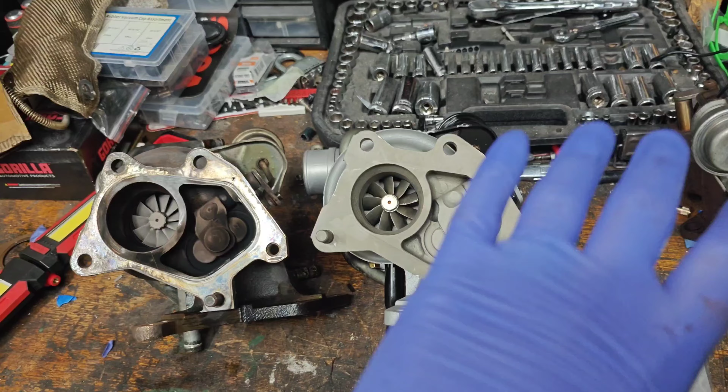This is a VF37 variant. I have a VF30 here that I may do this with as well. I don't need it, but just in case I have that. This is a twin scroll setup, but this works for all VF series, not just the VF37. The housings are pretty much the same on the front and what they can take in the back.

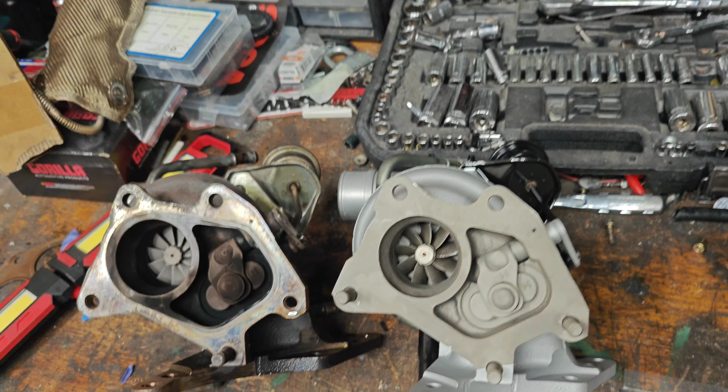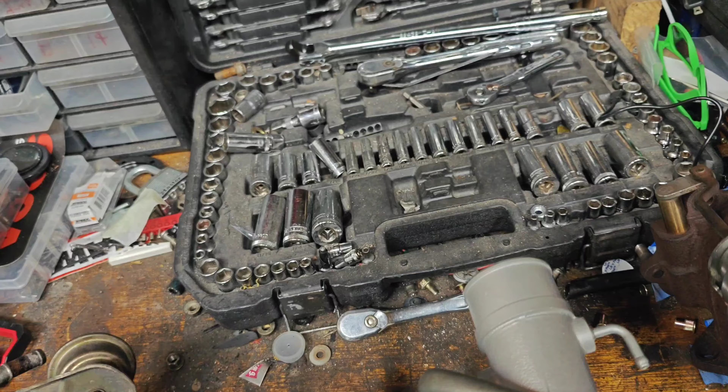So you can clearly see the differences on the turbine side here. Again, we have an 11 blade here stock, and then the 9 blade. You can see this is the G2 upgrade. So much bigger there. On the front, you are going to see compressor wheel changes as well. So let's turn these puppies around, and obviously it's a lot prettier because it's been ceramic coated.

Stock, and then upgraded. Again, looks beautiful too. I got everything painted. I didn't actually ship this, so this wasn't able to get painted, but it's a beautiful looking turbo. Let's get this puppy installed, and then after we do that, we will go get it

tuned. And I'm going to get an electronic tune, so I always do e-tunes where I can actually drive it. And then I get revisions back and forth. So we'll go back and forth, get it tuned, and then see what it kind of puts out.

I would show the install process. It's pretty easy though. It took me like 20 minutes to get the turbo out. Just the downpipe, you remove that. You don't even have to remove it all the way, and then, unless something's in the way, like I had an air oil separator in the way, you're literally just going to unbolt the turbo

from the up pipe. Take off a couple hoses. It's going to leak coolant everywhere, and then you just pull her on out. So it's not that big of a deal. Let's get this puppy installed. Again, before she goes in, same size housing. Nothing's changed, just the internals are changing.

So again, shouldn't experience any more lag. Just should experience more power. It's going to hold boost higher. This one tapers off a lot by redline. I rev to 8K on this EJ207. This is a 2-liter STI motor from like 2005, this revs out to 8,000 RPMs. By 8,000 RPMs, I'm only seeing about 16, 17 pounds of boost.

There's ways to make the VF series have more boost at redline, but even if you do have more boost, it's probably not going to produce that much more power. Just pushing hot air at that point, extremely hot air, just way out of the turbo's efficiency range. So this should help that, and let's get that puppy installed.

Oh, before we install it, just wanted to show what I'm going to do to prime it. So basically what I'm going to do is take off this. You need to prime a turbo if you've never done an install before. Most people do it one way. I'll show that way too, but I do it 2 ways.

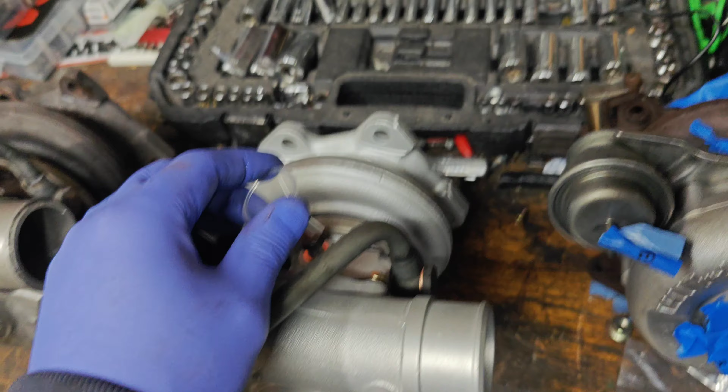So basically I'm going to take this banjo bolt off, put on this minuscule funnel, or a syringe or something like that, put that on here, pour just a little bit of oil through as I'm spinning it. And then obviously most of it's going to leak out the bottom because this is gravity fed down here. You just want to get it started, right? Just get a little bit of oil in there.

Then once you're done installing it, before you start the car, just pull the ignition fuse, fuel pump fuse, pull something to where it won't fully start. And then you can go ahead and just crank it a few times, just kind of push oil through the turbo. You don't want to dry start a turbo, just install it and then just start the car.

You definitely want to prime it. This thing, the RPMs are 10 times, 100 times faster than what the motor's running. So you want to definitely prime this before you just install it. Just thought I'd say that.

Okay, so at the computer now, we're looking over the dyno results after the tune.

So I'm going to show you 3 separate graphs here, but all in all, before I go into them, excellent upgrade. I'm not really one for power adders. I'm more one for spending on the brakes, suspension, lightweight, anything other than power. There's other ways to make a vehicle fast, I think.

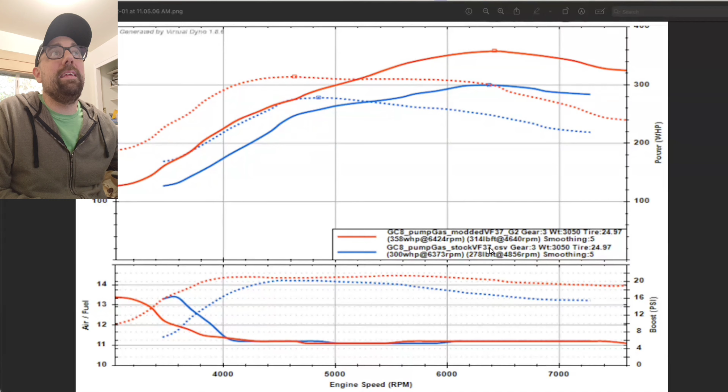But with that said, I was looking for something, A, if I was going to spend money on power, a very small amount, B, something that was identical to stock, just with more of it, and C, somewhere not really more than around 400 wheel horsepower. So let's go through and see what happened here. It looks like... Recording in progress.

Okay, so as you can see here, this is the dyno graph of before and after on pump gas. So this is the stock VF series with all the modifications I already had, and then the modded VF series. So we're looking at nearly a 60 horsepower increase and a 36 foot-pound of torque increase. The only modification that was done in between these two is literally just the turbo. Nothing else was done.

We gained 60 horsepower and 36 foot-pounds of torque, which is good, since some people don't have E85 readily accessible. This is about what I made on ethanol. I made about 350 on ethanol with the stock VF series turbo.

So my mods are just 1300cc injectors, AEM 340 hardwired fuel pump, and I bought an adjustable FPR. Well, I guess that is a difference, an adjustable FPR. That really helped keep the fuel more solid. But the fuel was already present, so that's more just keeping things solid throughout the rev range. You're not really going to pick up horsepower with an FPR unless you're adding to the fuel pressure so you can run a little bit different.

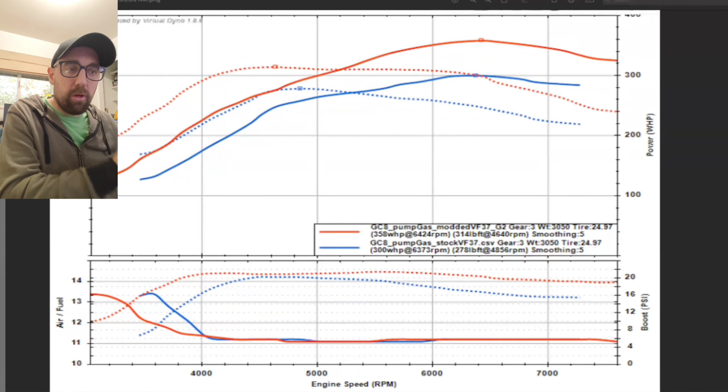So there is no spot up to the redline here where I'm below stock. It just beats everything. There's no lag, no extra lag, nothing. You can see the boost almost comes in quicker with this turbo. I found no ill effects at all. I can't find anything. The turbo was very easy to install. It was just like stock. I'm running an internal wastegate, the stock one, nothing crazy.

Okay, so next, probably the one that everyone wants to see. This is E85. You can just look right at these numbers right away, 423 and 378. Sweet Jesus, this thing is fast. I'm running about the same, maybe a PSI more. I think it's right around 24 and a half PSI. This one was only running 24. But the boost comes on pretty much the same.

I didn't log at the exact same speed, but you can look at it. They come on at pretty much the exact same time. No extra lag. There's differences in air fuel here. The reason there's differences in the air fuel ratio was the one thing I did mod, even though I said I didn't mod anything. Well, the FPR, that doesn't really count. I hardwired the fuel pump.

Before, I thought I had hardwired it correctly, but I changed things up and hardwired it in the sense where it's running 100% all the time. When you turn the key, the fuel pump runs at 100% and doesn't stop until you turn the key off. I have it wired into the fuel pump controller so that if the fuel pump controller is sending any signal, 30, 33, 60, 66, or 100% fuel pump duty, the fuel pump is running at 100%.

What that did was allow me to run consistent AFRs, very consistent. You can see it was kind of choppy with the blue ethanol here because it needs more fuel. There's pros and cons to doing this. Obviously, one of the cons is your fuel pump's running at 100%. It's probably not going to last quite as long. I'm going to plan on replacing it.

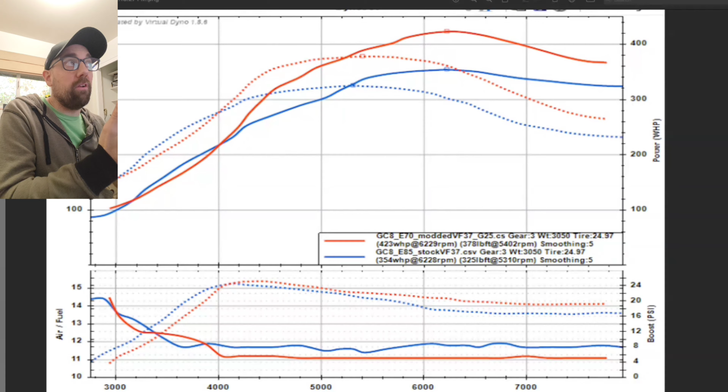I will run this on the street because I drive it rarely on the street. Maybe if I drive it once a week, I'll go hard on the gas once or twice a month. You don't want to run 25 PSI or 24 PSI on stock internals regularly. So I talked to the tuner and I said, let's turn it down for the track. And that is this. This is right around 20.5, around 21 PSI, which is what you're normally going to see. And we're looking at 401.

So 401, 400 horsepower on 21 PSI, 350 foot-pounds of torque. Very solid AFR. Just looks great. This is what I'll run at the track. This is where I'll run most of the time when the car's on. But on the street, I'll do the kill mode just to scare my friends if they want to ride in it. If you want to be very conservative, you could go down even lower.

To hit the same amount of horsepower that I had before, about 350, you could run this thing probably at about 16 or 17 PSI, which is crazy, and get like 350, 360 horsepower on E85 and be very conservative. That'll last a long time. That's about the same PSI as stock, right? And you're running on E85, which is very knock resistant and has those cooling properties, so it would last a long, long time on that. Obviously, I want a little bit more, not too much. That ended up very, very well.

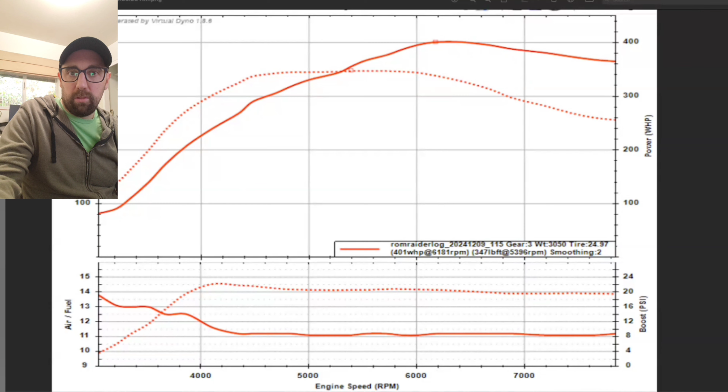Now we'll go into the Dragy stuff. Okay, so when I personally use a Dragy... well, let's back up a little bit. If you're not familiar with what a Dragy is, it's a Bluetooth device connecting to your phone, a tablet, or your laptop, that uses GPS satellites and time, your vehicle data, to determine quarter mile times, 0 to 60 times, 60 to 130 times.

Various times, and people use this with extreme accuracy. I've taken it to the drag strip. They're pretty famous, most people have probably heard of them. You take them to the drag strip on 10-second cars, and they get within less than a hundredth of a second of what the time slip says.

And same with the speed. Getting the same trap speed on the Dragy, literally within a hundredth of a mile an hour from the time slip to the Dragy. So people have done these tests over and over again. They're very, very accurate. Dragys are a little bit better because you can do it at your convenience. That's the biggest thing. Kind of test your modifications and see how your car's doing, see if what you're doing is actually making it faster.

So I bought one of these a little bit ago. You may have seen it on my Instagram. I think I did a quarter mile just on an open stretch of road, which, looking back, I could have done a whole lot of things different, but it ran pretty well.

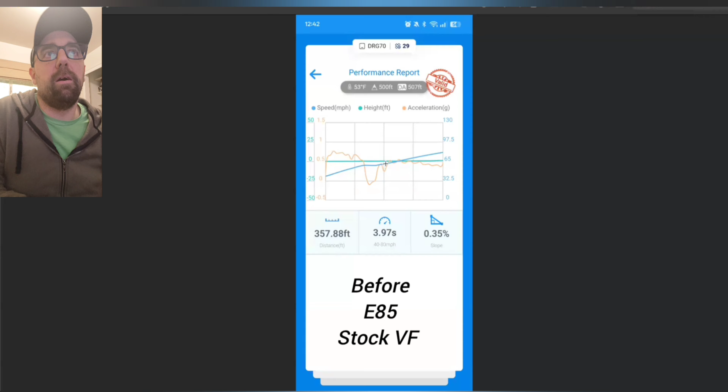That's the newer Supra with the B58. That's a good comparison, right? Just slightly faster than that. Obviously, no one's going to keep those cars stock, but this is what you get with the fastest model Supra, right around here. Okay, so that was that.

You can notice this dip here. This is the dip in the acceleration. You see the orange is because I shifted. I wish I would have done this test just staying in third the whole way, and I can't really go back, because on these other two ones, you're going to see I just stayed in third.

Because I had more torque down low, I was able to just stay in third, and it didn't feel as laggy. It didn't feel like I was bogging down the motor. So I could do these other ones in second and third, but I feel like it's a good test to just stay in third. That way there's no shifting, no extra parameters involved.

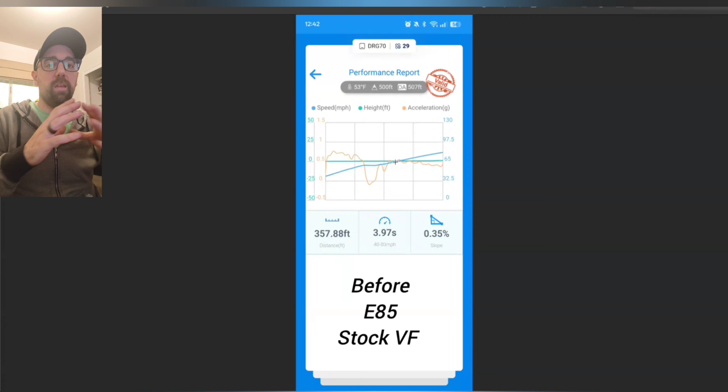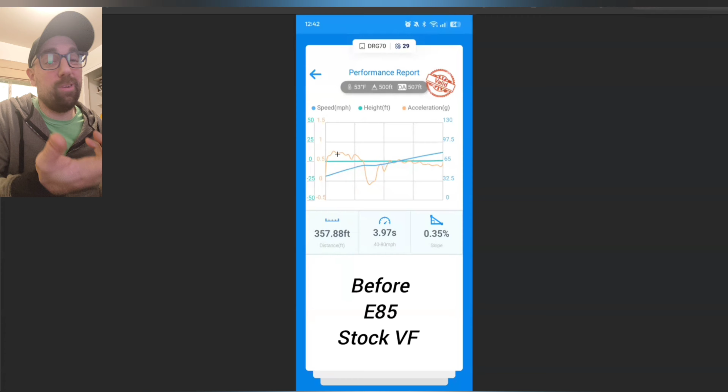So this did involve the shift. You could say that hurt me, or you could say that helped me, because I was in my power band for more of it. And then the shifting part took about a half second at least, so that would add some time to it. But again, we're more in our power band, staying in it the whole way.

So here we go. Here is the pump gas. This is E85 stock VF series over here, and over here is pump gas on the modded VF, what we just did. We just hit 3.59 seconds. So we already saw nearly a 0.4 second jump in 40 to 80, which is a significant jump.

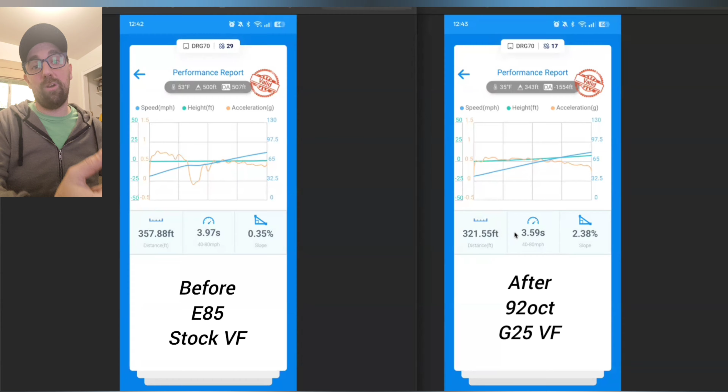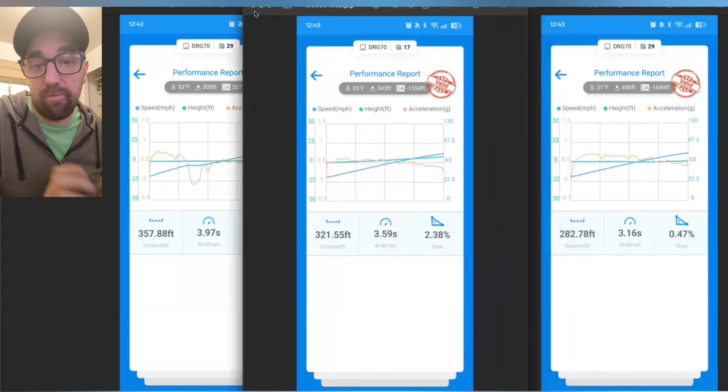That's obviously, if you talk about a tenth of a second being like a car length in the quarter mile, it's almost the same here in 40 to 80. So imagine like 3 or 4 car lengths difference in terms of, if you were racing yourself 40 to 80, you'd be up here, like three or four car lengths in front of yourself, pretty much. And then we get into the crazy stuff.

So this right here, let me move this over a little bit. There we go. This is the 85 kill mode. This is the 420. This is 3.1 seconds. This is crazy fast. But obviously there's faster cars out there, even stock cars that are faster than this. Again, no shifting. This is just keeping it in third, because especially on 85, I had a ton of torque. I started at about 35 and then went into 40.

Yeah, it is fast. To put it into perspective, I'll put a link in the description to 40 to 80 times for production cars. The Hellcat that I always make fun of is the quintessential drag car, that's its bread and butter, is 3.1 seconds 40 to 80. Granted, it may still be burning out. 3.1, the same as a Hellcat.

A Nissan Skyline GTR, the newest ones, are 3.2 seconds. You're already beating that. A Nissan fucking Skyline GTR. Again, these are the stock unmodified versions. And a Carrera GT3 RS. This is already beating those cars. Some would say supercars. Hellcat maybe not a supercar, but in the drag aspect of it, sure. But yeah, holy shit. This is very, very fast.

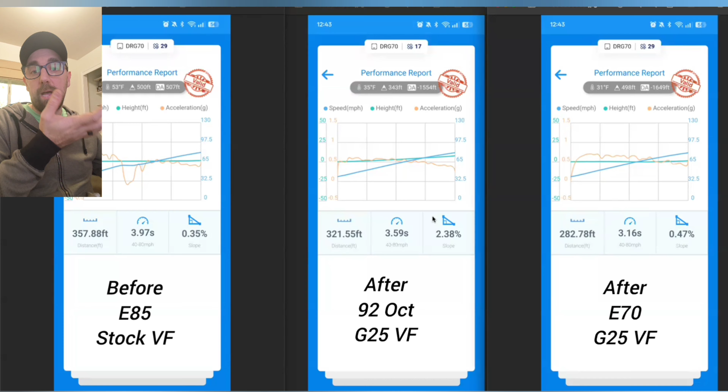Maybe I'm just getting older. I guess dyno is the old school method, but with a dyno, you're trying to force air and pretend, especially if you have a top mount, force air and cool stuff off. You may be able to get more or less on a virtual dyno. So, varying degrees. If you don't want to use a dyno, you can do this test too. A Dragy is like $150-$200 now. Very easy setup, and you can easily see as you progress what kind of gains you're making in general.

This is a great one for people with the STI 6-speed, because in third gear, if you just keep it in third, well, it won't be a good test for the USDM guys. And that's another reason why I went out here, because 80 miles an hour in my third gear is like 7,800 RPM. Most USDM models won't rev out that far, right? They only rev out to 7,000. So you would have to shift into fourth gear. I can literally do this entire thing in third. So that gives me a leg up there, because I just rev it out to 8.

Because I need to do that for the logs anyway that I'm sending to the tuner, so that does help me out quite a bit. But either way, what we're looking at, 3.6 or 3.16. Crazy 40 to 80 time.

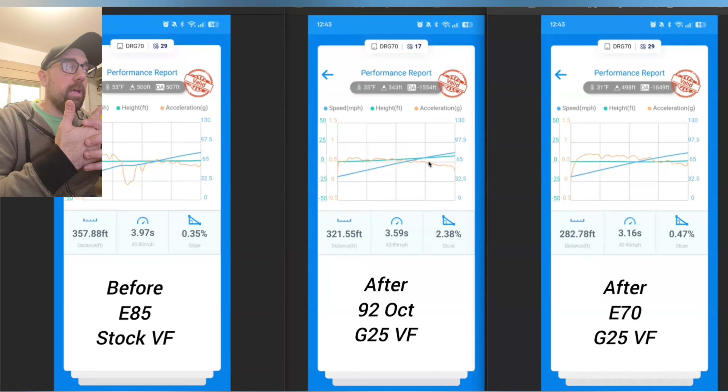All right, let's go out to the garage. Let's look at the turbo installed, go over a little bit what's left on the car, and then I did some changes to the garage. Okay, so back in the garage. Finished up the car. Obviously, wanted to show the finished install.

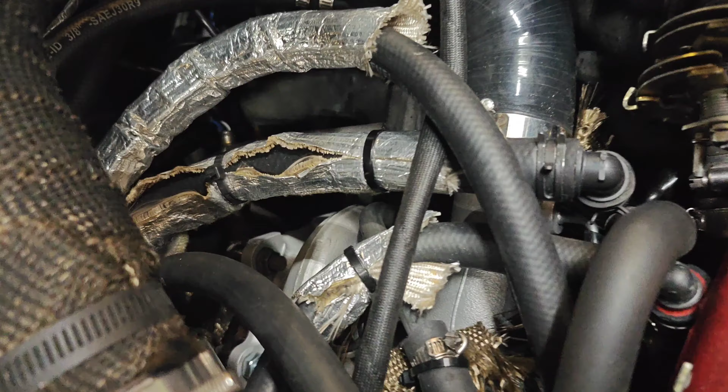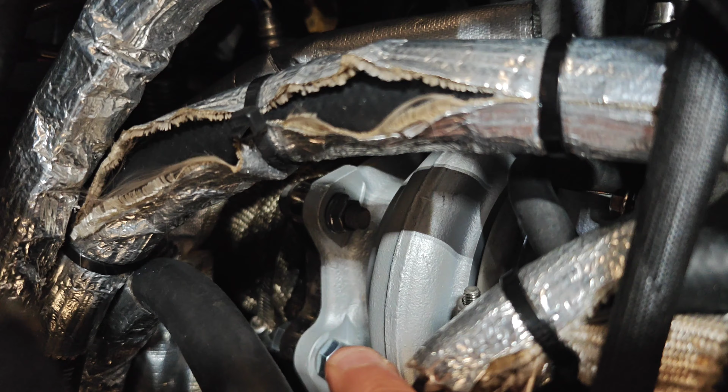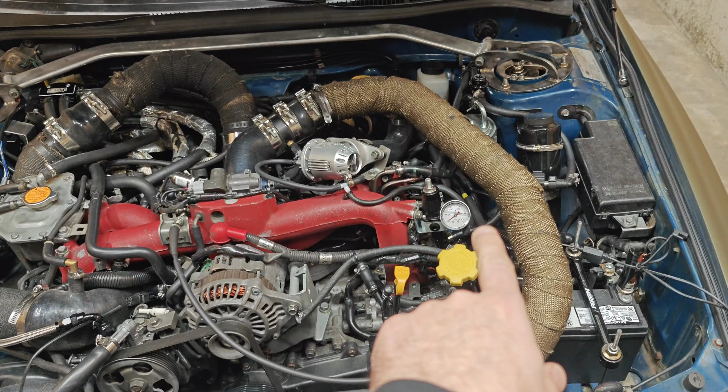As you can see, that is the turbo. That's got a ceramic coat. See, we're missing a couple bolts, or some were stripped, so I went and bought some more, some locking washers for those. But we can see the complete motor. If you haven't seen it in a while, FPR was added. And then again, I have a blow-off valve. Don't do that unless you're speed density tuned. I can do that because it won't hurt anything.

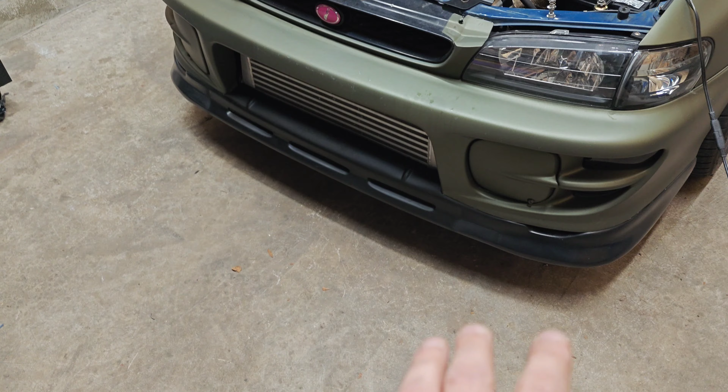Got a new lip. I don't know if I've shown that on the channel yet. And then the carbon fiber hood. I showed a video of doing that, but not it on the hood. Looks really good.

But as you can see from the video, the garage has been kind of updated, fixed, cleaned up a lot. Hear me echoing in here. It had gotten really bad, so decided to remodel. That's why it took so long to get these videos out. I'm not totally done yet, but it does look a lot better. Things are a lot more organized, as before they were not.

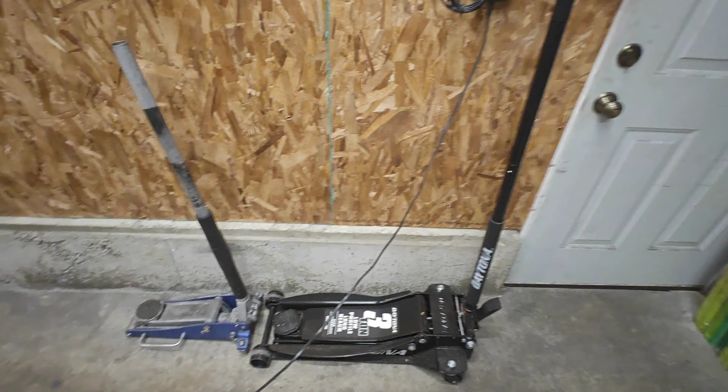And I got a slightly larger tool chest. Got to peel that sticker off the bottom, and then moved the compressor outside and hooked it up to a switch. Obviously, the tank's a little bit low, so it needs to run. And then got everything off the floor. The last thing I would have to do is just clean up that fucking cluster. That is the engine hoist, an engine stand, and a transmission jack. I need to get those out of the way. But otherwise, it looks great in here.

I just used OSB plywood. I'm going to put some trim around. I have just some spare trim lying around. But was able to do all this for not very expensive. The OSB was about $300. And then screws, I had some deck screws already, but I needed to buy some. It was about $30. Then I was going to buy a secondhand toolbox, but I ended up just buying a new one, which was deeper and fit everything. It's still like a 26-inch or 27-inch. It's not a huge one.

But I also bought this workbench for $100 used. So those two combined cost me about $300 because of Black Friday stuff, and then this was used. And then this shelf was free. Someone was giving it away. I just used OSB plywood and then put these fender washers on here and secured it to this frame to make sure it won't go anywhere, because there is a lot of weight on this. And I also hooked it up to the plywood and anchored it to the wall so it won't move. And then this shelf was like $30. Now it houses all my fluids.